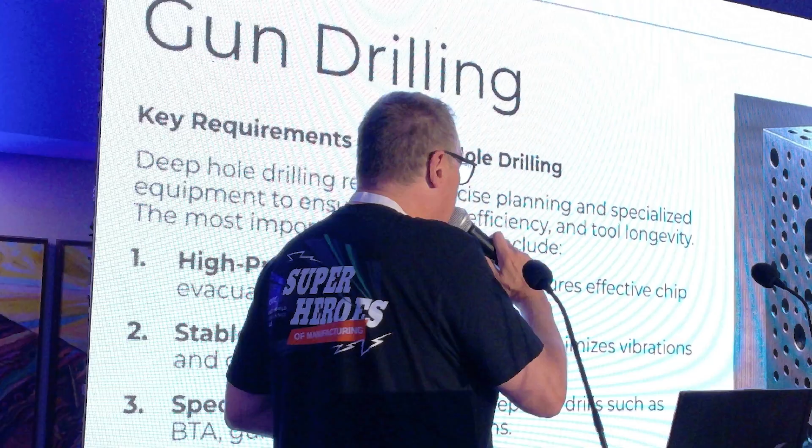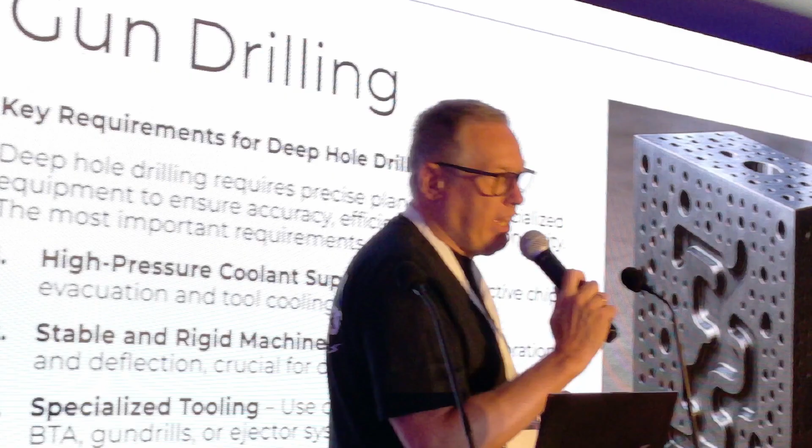This is important, and one feature we have developed, or ENCY developed together with us, is gun drilling. What does that mean? What is gun drilling? Gun drilling is an operation or feature for drilling very deep holes, with different types of machines - standard CNC machines, but also very special gun drilling machines. It's really different from normal hole drilling.

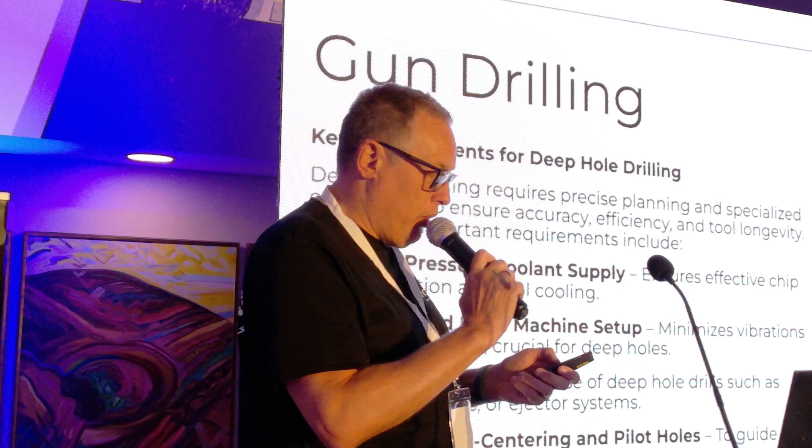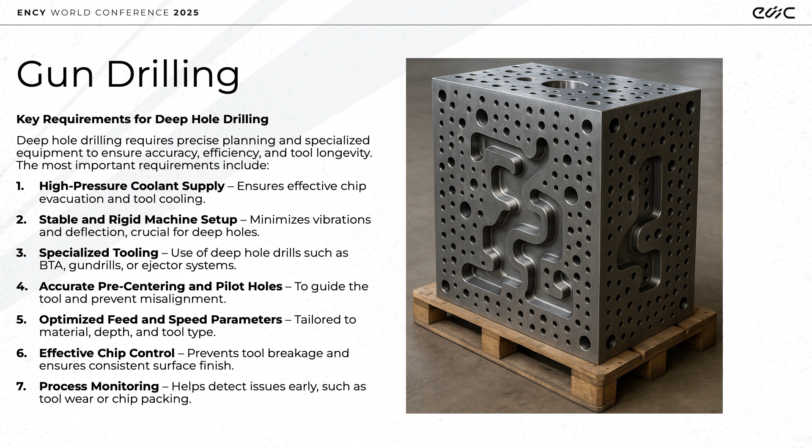So what are the requirements in case of gun drilling? It's a high pressure coolant supply, a stable and rigid machine setup, specialized tooling, accurate pre-centering and pilot holes, optimized feed and speed parameters, and this is one of the most important things here - effective chip control and process monitoring.

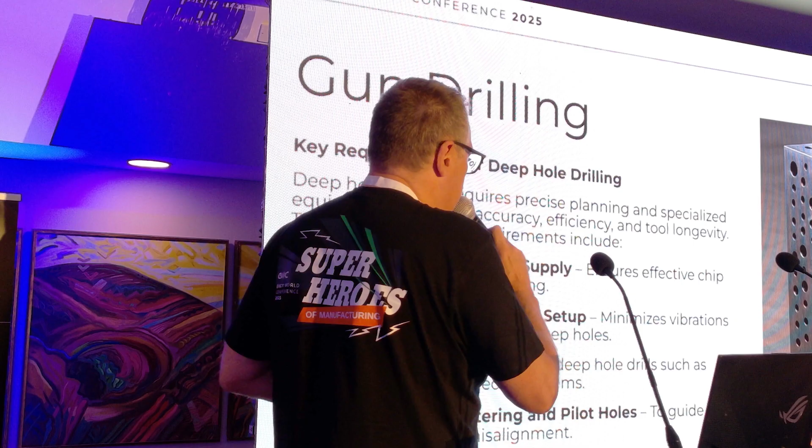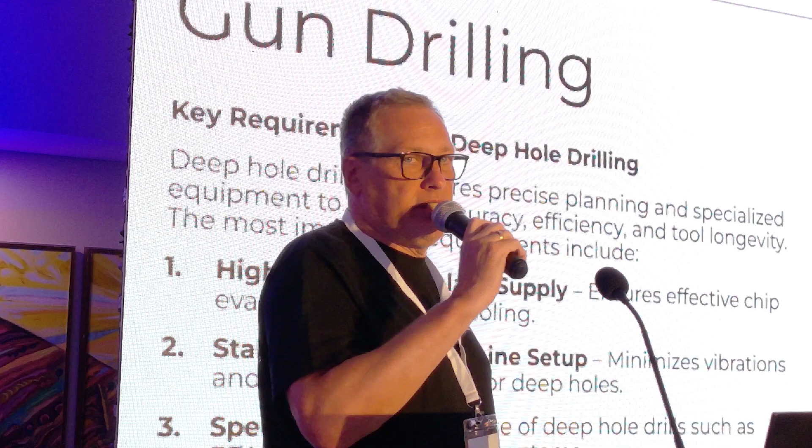So we want to make parts like this - for example, hydraulic parts or something like that, or for the mold industry, also very interesting. This is the coolant inside the mold, drilled by gun drilling.

Here you can see what the first step is if you want to use gun drilling. Maybe it's the same as the first step with normal drilling - that's spot drilling. In this case, it's in steel with a spot drilling tool with 12 millimeters. This is an easy step, the same in all drilling operations.

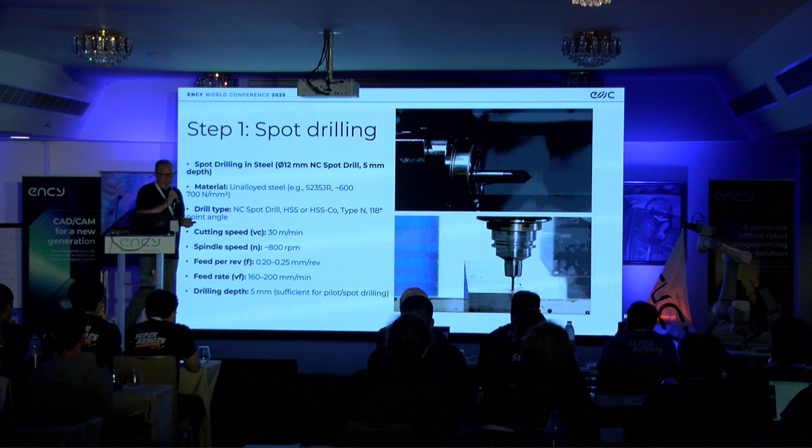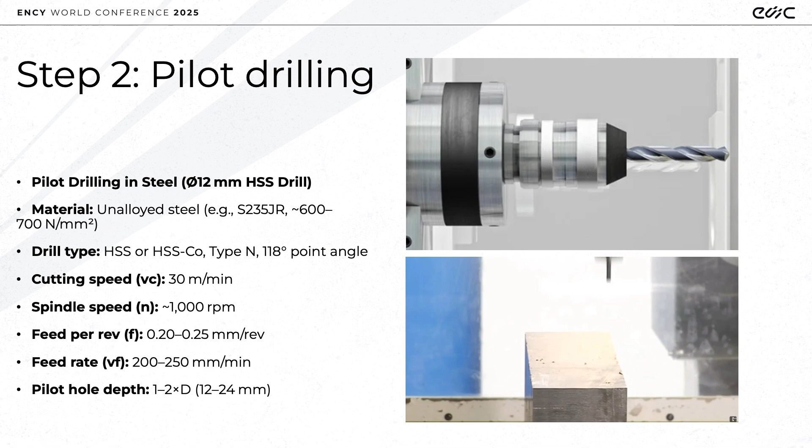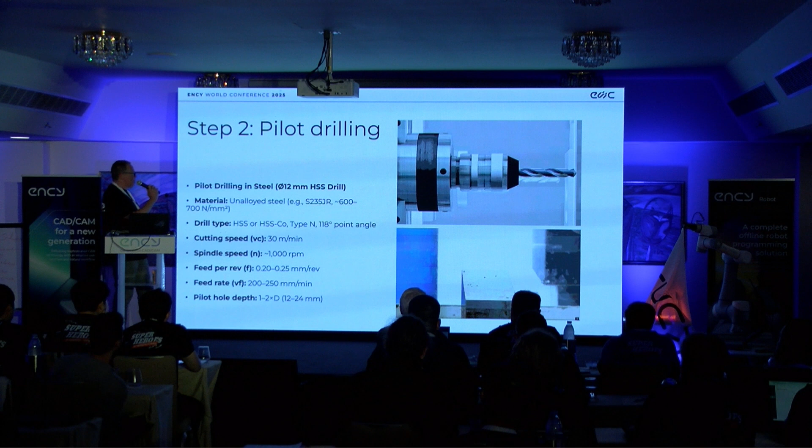The next is pilot drilling. Pilot drilling means the depth of the hole is 1 or 2 multiplied by the diameter. In this case, the diameter is 12 millimeters, so it's 2 multiplied by the diameter, which is 24 millimeters. We make a hole 24 millimeters deep in the part.

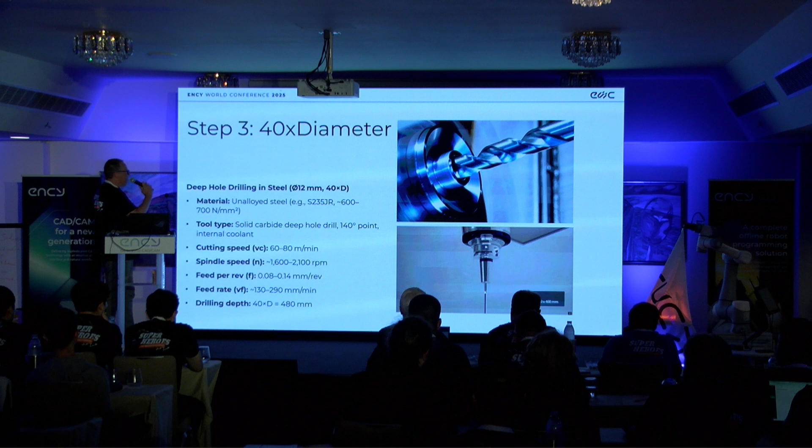That's easy, the same as before, but now comes the new feature - step number 3. Step number 3 is a very long tool, 40 multiplied by the diameter. In this case, the tool is 480 millimeters.

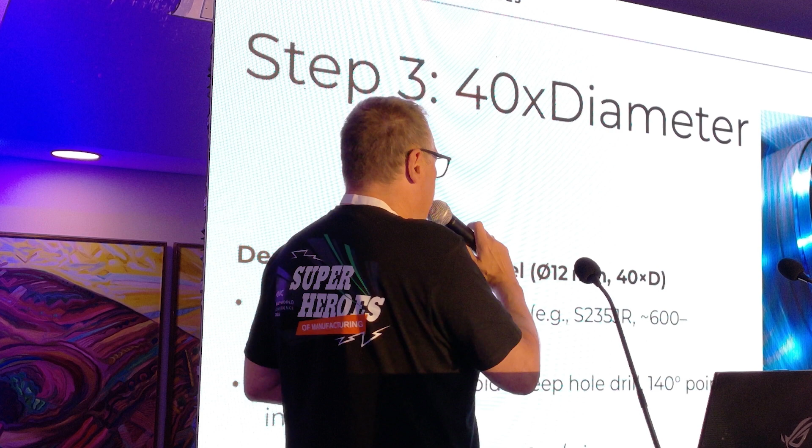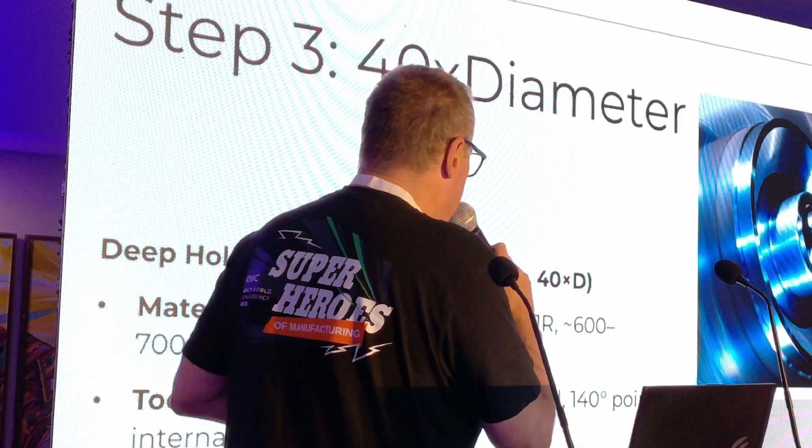Important in this case is that we reduce the feed at the entry and at the exit - we reduce the feed and also the spindle speed. We cannot use normal cycles; it's a special cycle from ENCY. I'll explain later - first I want to explain how the operation works.

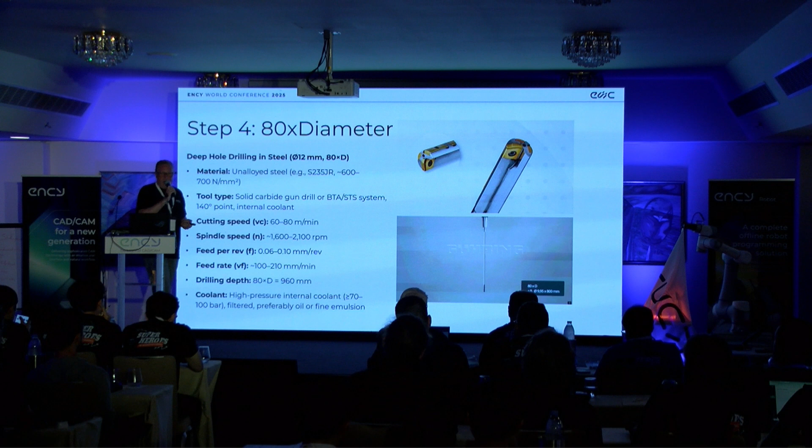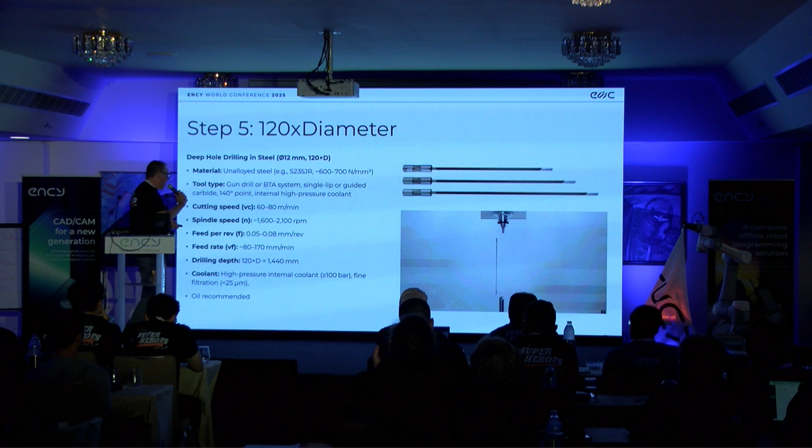The next step uses the next tool, 80 multiplied by the diameter, so now we're at a depth of 960 millimeters. And this is still not finished - the next is 120 multiplied by the diameter, giving a hole depth of 1.5 meters. There really are tools, for example from Gühring, that are more than 3 meters long.

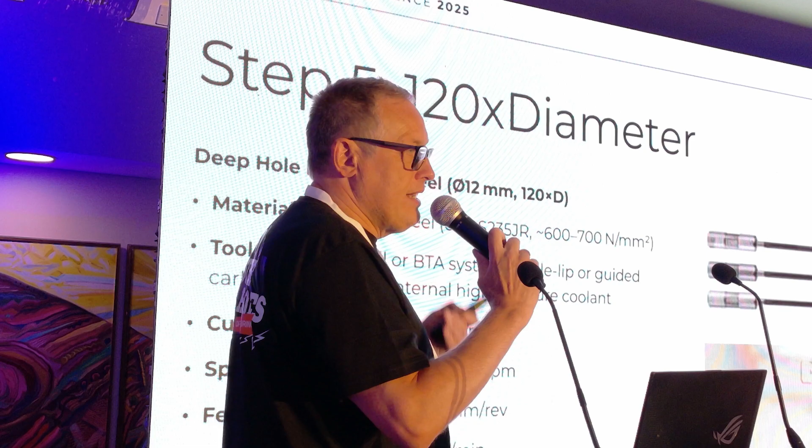For these very long tools, it's very important to have a special operation to do this. How can we solve this problem in ENCY? This is the new feature in ENCY we have right now - gun drilling with ENCY.

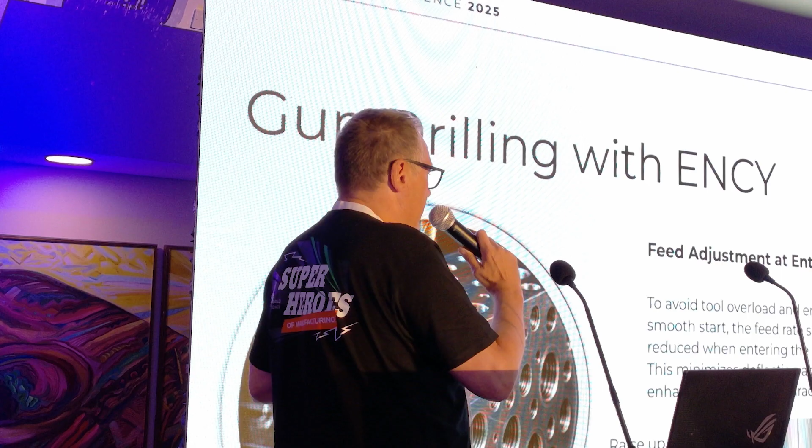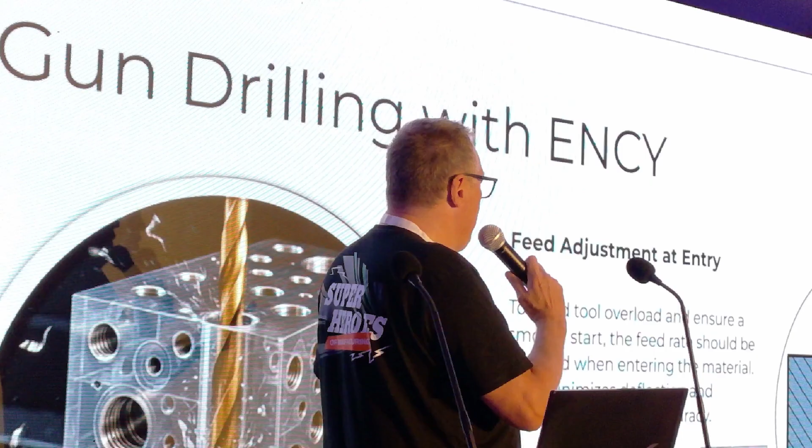First of all, what's important are the requirements before we start in ENCY itself. We have to reduce the feed at the entry - after the pilot hole, we go inside the hole with spindle at 0 and very slow feed. Once we're inside the hole, we start the spindle, not earlier, so the tool is very stabilized.

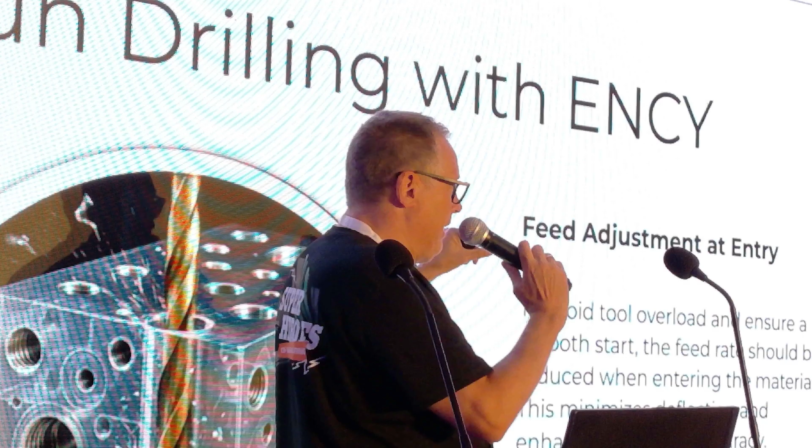That's very important. Then the next point is the exit - it's exactly the same. It's not allowed to exit the part at fast speed.

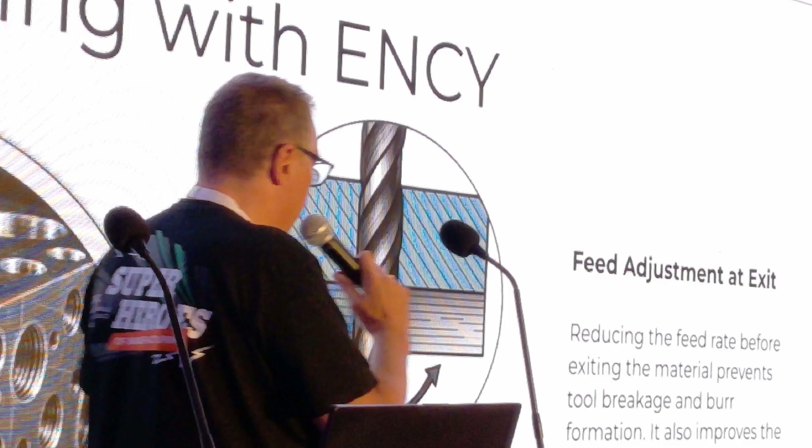So it's the same. We reduce the speed or feed at the exit of the part. Okay, it sounds not so complex, but now it gets more complex.

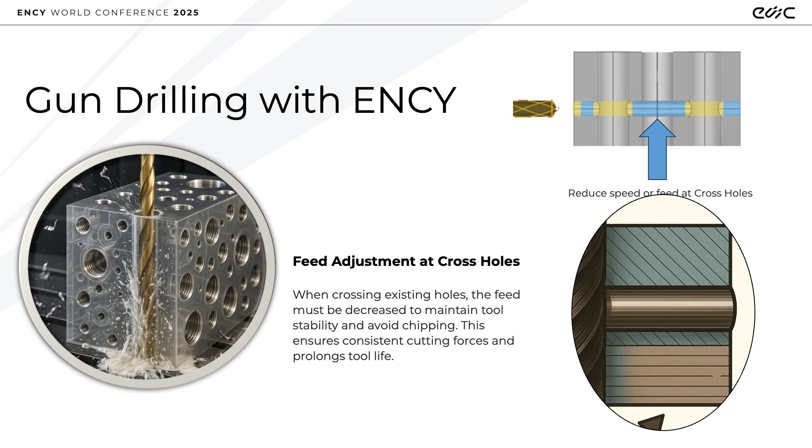The next case is cross holes. Maybe we have cross holes and we have to reduce the speed. If we go inside a cross hole, we reduce the speed in the cross hole. We have to reduce the speed at the exit of the cross hole. This is more complex because ENCY has to detect where the cross holes are.

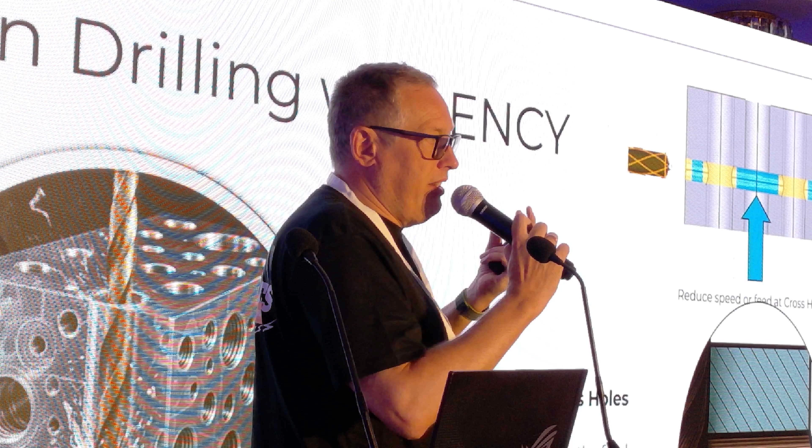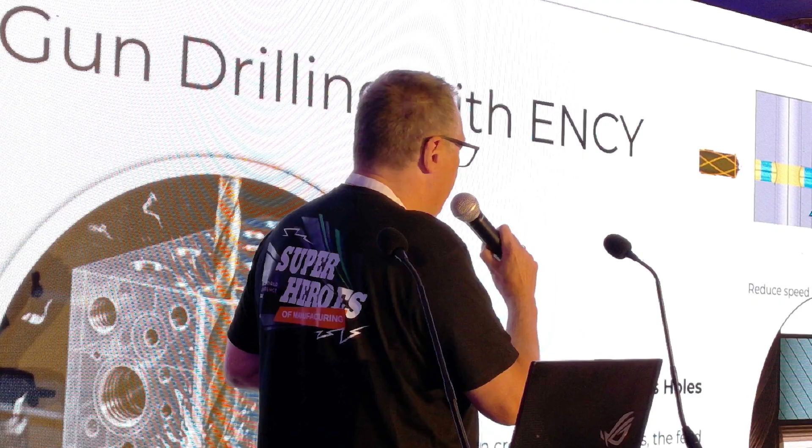For example, if you change the operation, it's very simple in ENCY to change the operation. In that case you have to understand there is no cross hole now, and the operation is totally different. If you find cross holes, you have to detect that you need to reduce the speed and the feed in these cross holes. If you work with long tools without this operation, you have no chance. After 30 seconds, the tool is damaged, and the tool is really expensive.

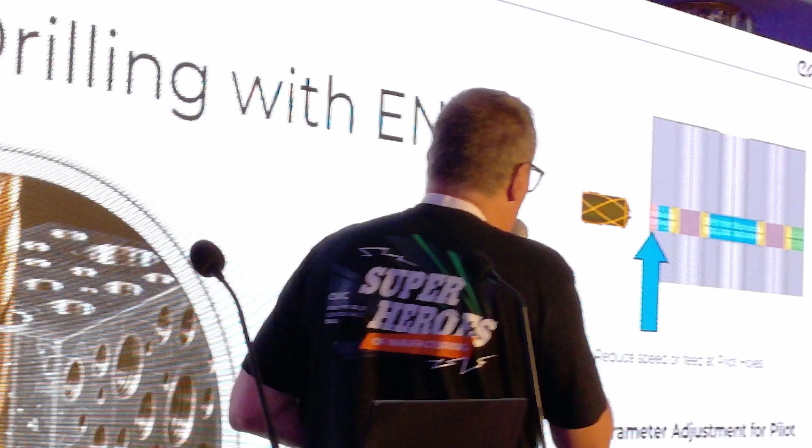Okay, we also reduce the speed in pilot holes. That's what I said before. So we go inside the pilot hole without spindle speed and with a very slow feed.

This is the new feature inside ENCY where you can find and work with this feature. First of all, you have to select that you are working without cycle, because it's not possible to use cycles in this gun drill mode.

The next is the step distance. This value could be positive or negative, and that means at what position it stops. For example, if I go to the pilot hole and the pilot hole has a depth of 95 millimeters, I want to stop 5 millimeters before this deepest point, so in this case 90 millimeters.

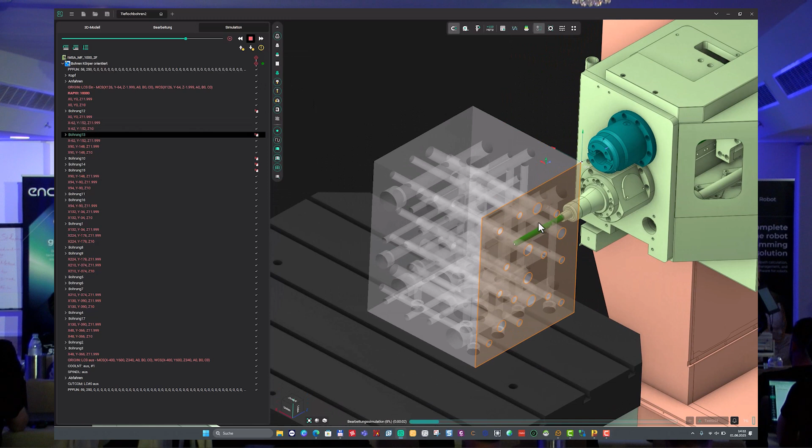Okay, here we have a short movie. This is a special gun drill machine. You can use a normal machine, but also a gun drill machine. The difference in the gun drill machine you see here is that the tool moves inside the part and the machine is fixed.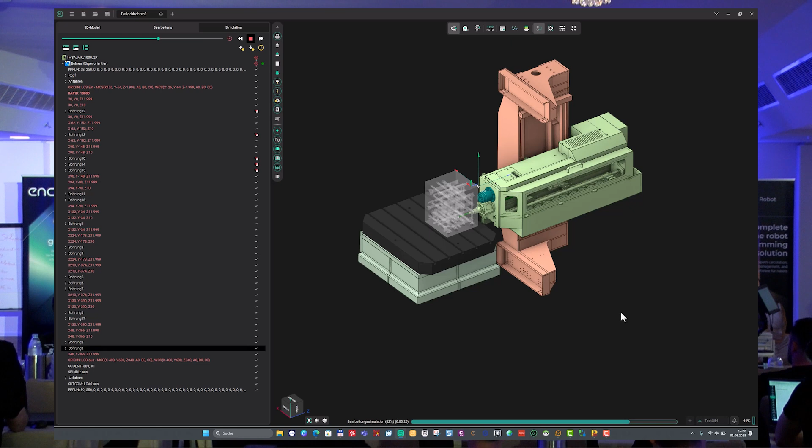There are different types of machines. TBT from Germany, for example. There are a lot of machine builders from the USA, and I think from China also some machine builders, and they make a lot of hydraulic blocks and molds. In mold operations, it's very, very important to use this feature.

Okay, what is the potential for us? What can we do and how can we make money with this new feature?

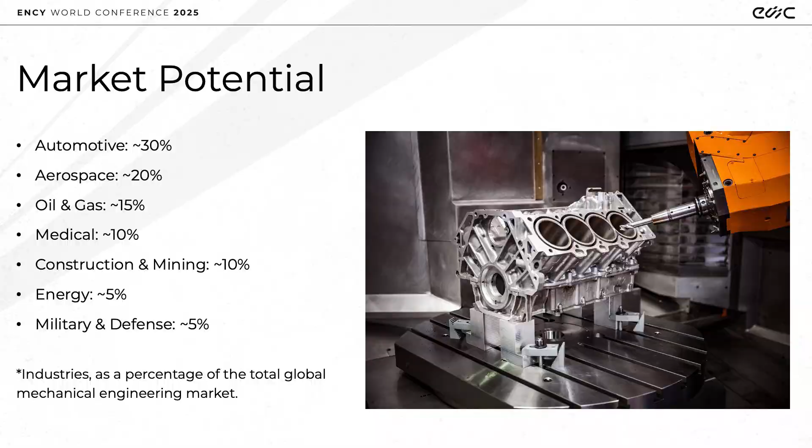Yes, these values are based on Germany. I cannot say what the situation is in other countries, but in Germany we have automotive for sure at 30% because of the molds - it's exactly what I said. Aerospace the same, oil and gas, medical, construction and mining, energy, and military and defense.

Okay, one of our customers, I can explain this company. It's a German and Japanese company, called HWS Sinto.

They have worked with Tebis many years with gun drilling. Earlier they worked with RTM, a special solution from Italy, Lemoyne. Lemoyne has a special solution for gun drilling, they do nothing else, only gun drilling, and they are really successful with this.

Other solutions - yes, for sure we are not the only one with a solution for gun drilling. One of them is Lemoyne. In my opinion, Lemoyne is really the greatest competitor in this. They have a really good solution, but the interface is very poor, and they stopped development. So RTM, I think they stopped development totally, so it's not really a competitor.

Mastercam have a tool called ProDrill. I cannot really say how good it is, but they have a solution for this. Next there is a company called GIPCAM, not GipsCam - GIPCAM. GIPCAM is a company from Dresden in Germany, and they also make nothing but gun drilling operations. Right now they also have a 3-axis and 5-axis operation, but it's very poor and it's from ModuleWorks. But the gun drilling is not so bad.

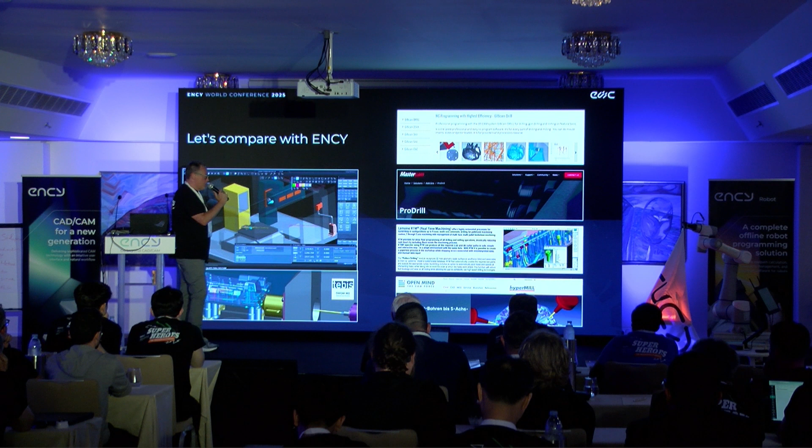The next is Open Mind for sure, they have also a solution, and in my opinion a good solution is also Tebis. They have to define a lot of tools, this is really a problem, but the solution is good and works really fine. And the price for Tebis in this case for gun drilling is more than 30,000 euro.

Okay, this is the information about gun drilling for sure. Tomorrow maybe we have more time to explain, if you are interested, how it works in detail.

More information about our company and additional apps we developed. I can say 90% of our job is ENCY, and 10% is around ENCY. For example, CAD - we are selling SolidWorks in Germany. And we developed some of our own solutions.

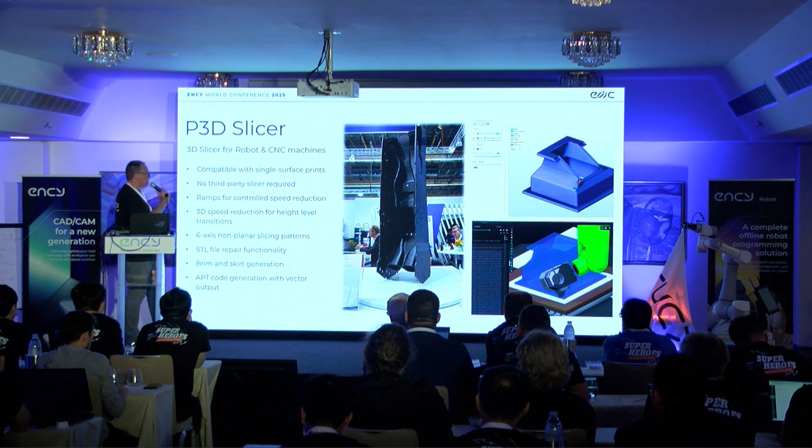And the main product in this case is our slicer, it's called P3D. The slicer is 100% developed by us - no Cura, no other core. All of this is from us.

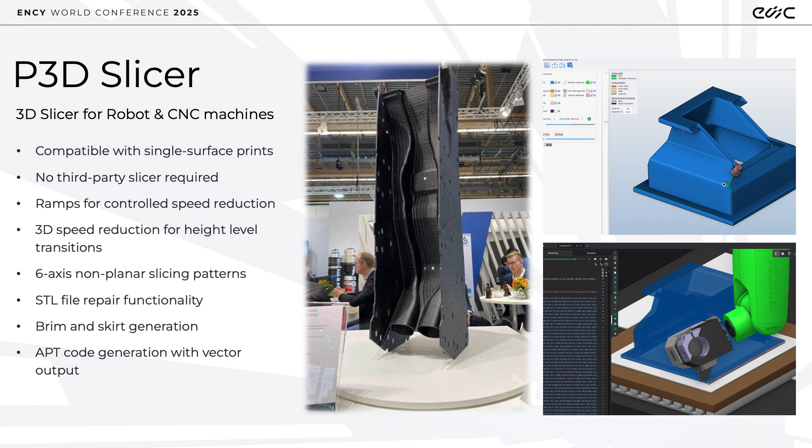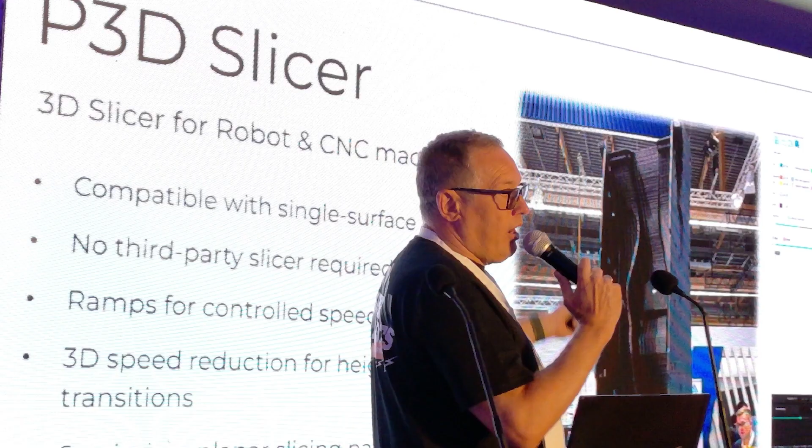So we have a possibility with the slicer to make really very complex parts. This is a part from BMW, a console for a Rolls-Royce. Right now they make 10,000 parts from this per year with the robots and with our software P3D, and also with ENCY. But ENCY in this case is not for creating the slicing, it's only for the robot simulation and the milling operations.

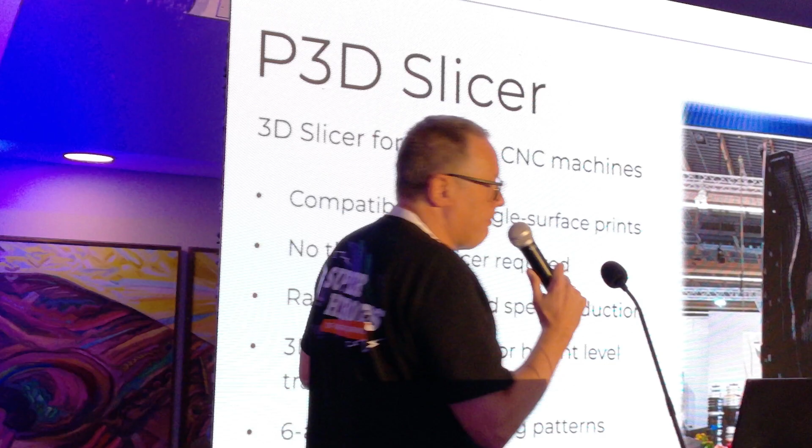Maybe some information about P3D: compatible with single surface prints, important for customers like BMW because their parts are not closed, very complex parts, ramps for controlled speed reduction, 3D speed reduction for height level transition and so on. Maybe the question could be, why do you develop a slicer if ENCY has a slicer?

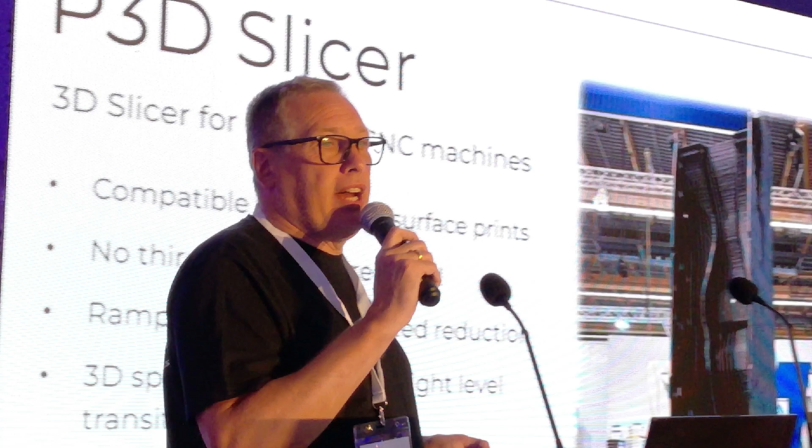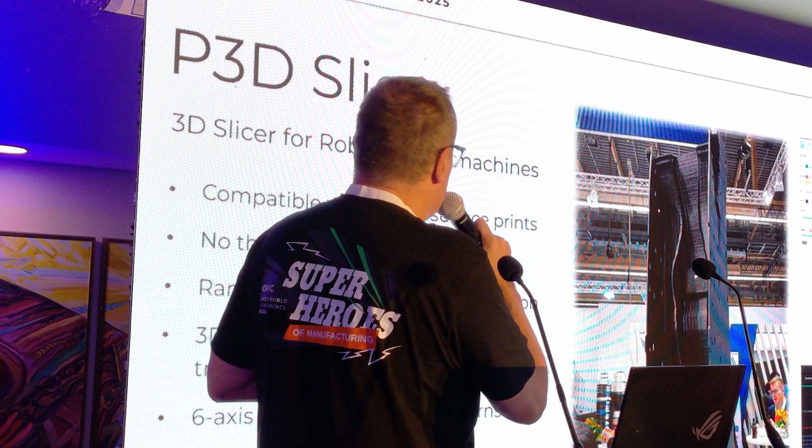It makes no sense maybe now, but we started with this slicer 5 or 6 years ago, and at that time the slicer from ENCY was not as high performing as P3D. Now maybe it is better, but in my opinion we still have some features in P3D that are very good, for example support material and something like that.

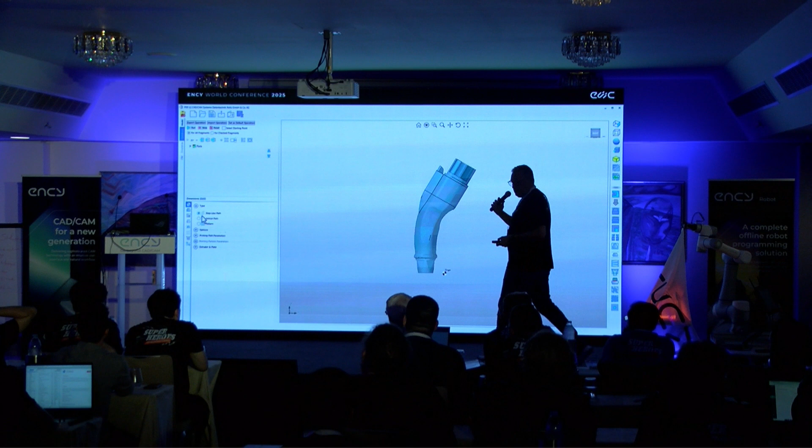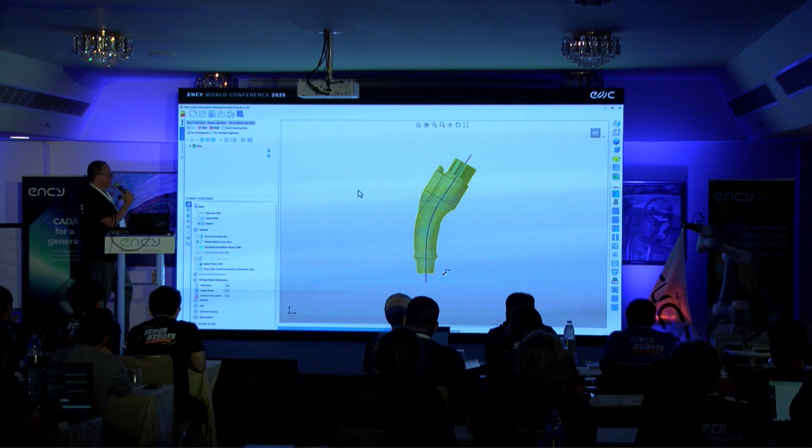Okay, here you can see a very simple part. Normally in Germany we are selling P3D only together with ENCY, with ENCY Tuner or with ENCY, but it's also possible to get the software as standalone. This is a simple part, so you can select the central curve here and then some parameters. After that we have the slicing solution and we have a simulation here.

And then we can see the simulation with the nozzle here in this case. After that, we go with this result with an APT code to ENCY, and then we make all the other things like singularities or something like that in ENCY. And you can see here, we make the toolpaths now - here this is the APT code. And then we are in ENCY, and in ENCY we make the simulation, the singularities, and all the other things that we have.

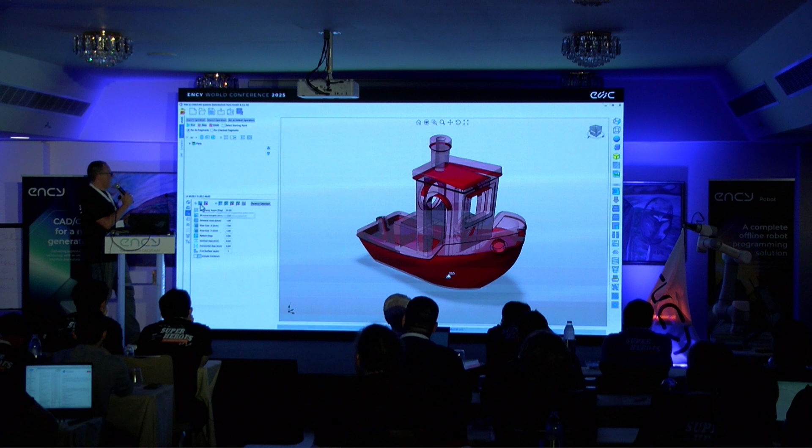A little bit like we have integrated last year with Cura, and it's a little bit the same. Also possible for parts like this, where we are using support materials too. Normally we will not use support materials, but sometimes it's necessary.

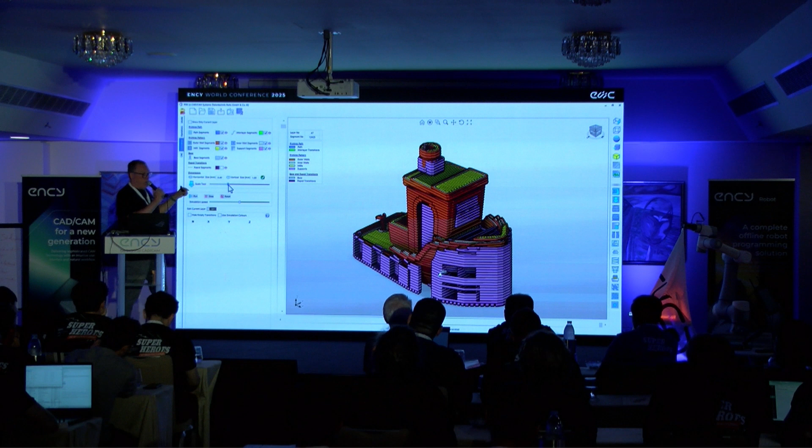Looking at our customers, and we have really a lot in this area, 80% are using the planar operations, not the non-planar. The only point they're using is, for example, 45 degrees, printing with 45 degrees - that happens very often. But a really complex part, non-planar all around the part, they do not use that very often.

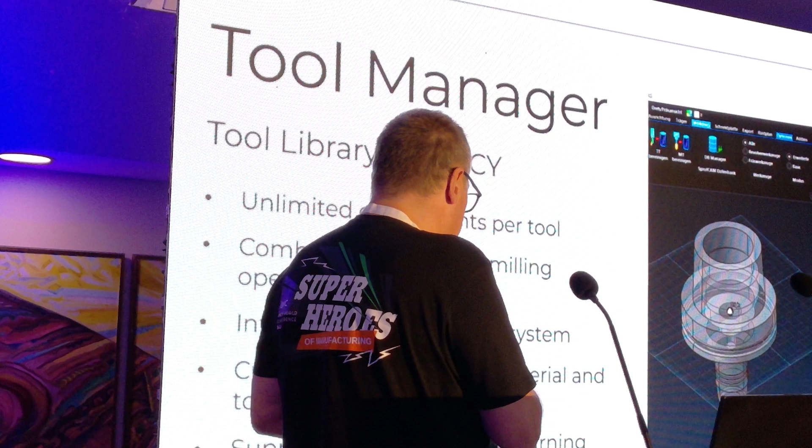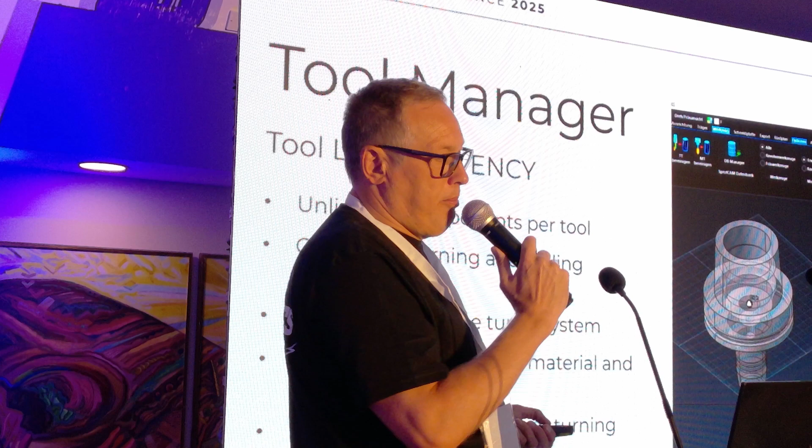Okay, the next tool we have created is a tool manager. It's also a little bit different to the tool manager we have right now in ENCY because it has a possibility to combine the parts with TDM and with some other software systems in Germany, also with Coscom. And it's not only a tool manager, but it's also a manager of all the parameters inside the tool.

For example, you can check how often you're using the tool, how often you're using the inserts, and so on. The next one is a project for a customer, and that's what I want to say to you.

If you have a special customer, maybe you say, okay, I want to buy ENCY, but I need a very, very special feature, we have the possibility to create these features for you. You can ask us, it's possible. In this case, the customer makes watches.

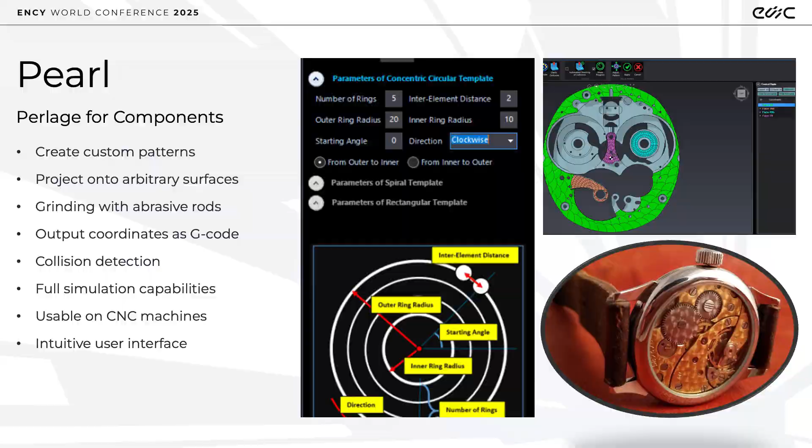You can see here, and for him it was very, very important that he have the possibility to make perlage. This is called perlage, what they have here in the patterns. And it was the only possibility for us to sell him ENCY, so we developed this software for him.

And here you can see the software. We have different possibilities to create these patterns. It's not so easy because you have to detect the collisions and all the things. And it's really grinding, so they have very, very small tools and they grind it here.

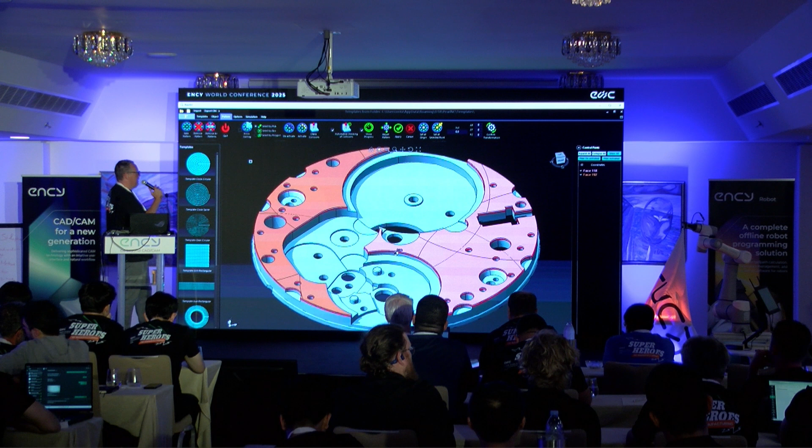Yeah, with a simulation, and then still you go to ENCY and you can make the post-processor. So we create the APT code here, go to ENCY, and can make the simulation after that in ENCY.

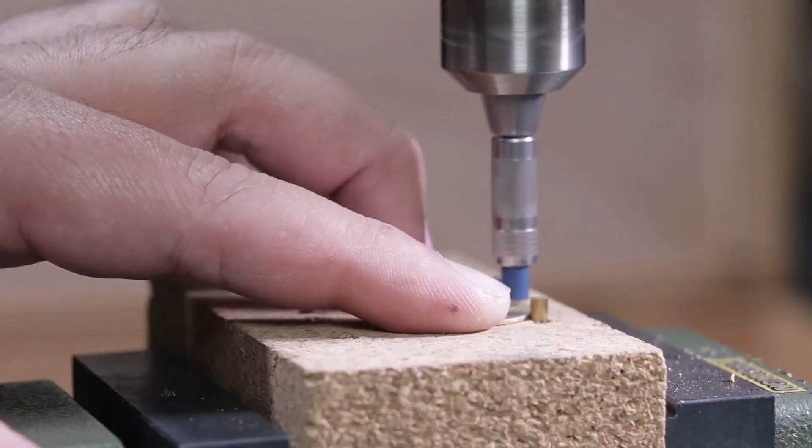Here you can see the manual step. For sure this customer has a CNC machine, but you can see how it works in manual. So it's really a grinding operation.

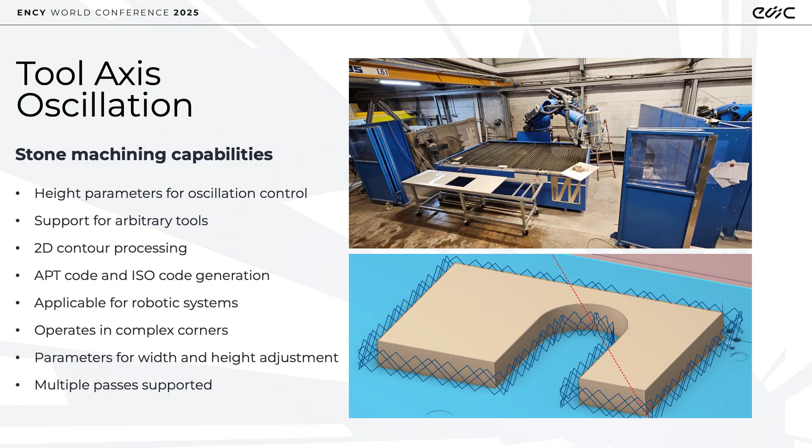The next one we have, the operation is exactly the same. There's a customer for stone machining, and this customer needs a very special feature. He has very expensive tools, and he needs to use the tools on the whole length.

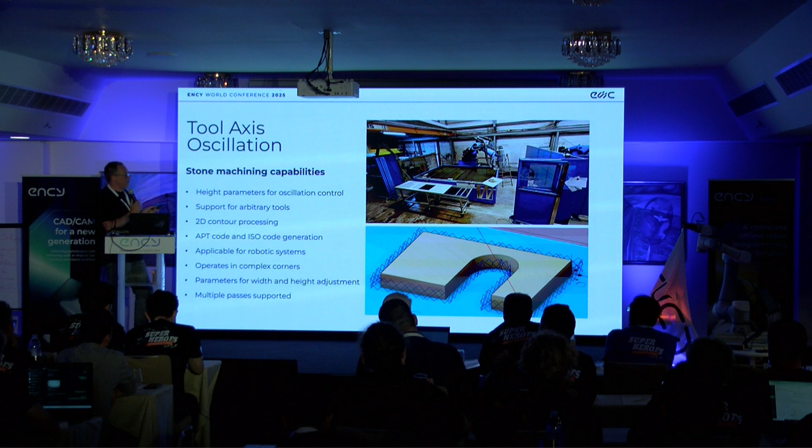And we developed for him an oscillation tool inside ENCY. So that means we can select any 2D contour, and after that we make an oscillation program. This is very important for stones in this case. And then you can see how it works here.

So you go up and down with the tool, and you use the whole length of the tool. And it's interesting in these corners, because the toolpath looks very strange in these areas.

And then he moved not only one time, but more than one time around the part and finished the part. It looks really nice in case of stones, and the tool is really, it's perfect after that.

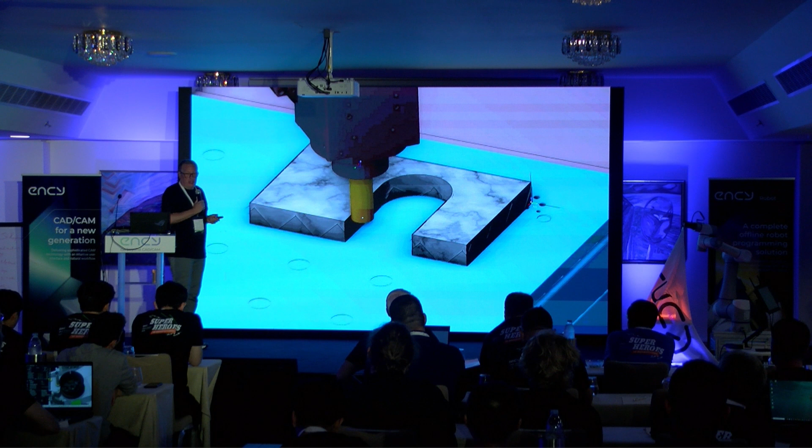Okay, the last one we have developed for you, maybe, is an online tool. This online tool has a lot of machines. We are in the market for more than 30 years, so we have more than 2,500 machines and post processors. And we want to give you these posts and these machines if you want.

So you have a possibility with our website to open this site. You can, for example, search for any machine of this kind, DMG. Then you can search the machine you need and you can add it to the request.

The same with the post processors, so you can search for the post processors and for the machines, or you can create a new post processor inquiry if you did not find the post processor or the machine. It's also possible.

Yeah, a lot of machines there, and yes, I can send you the information. What is the website where you can find it?